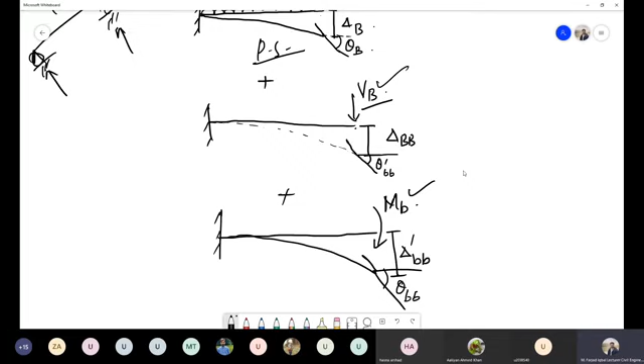Yes, sir. So now start writing the compatibility equation for this structure, for these four beams.

So what will be equation one? Anyone?

Delta B plus delta BB plus delta dash BB. Yes, it's that simple. So it will be delta B plus, because in the initial one we have this deflection, in the second one we have this deflection due to this vertical load, and in the third one we have delta dash BB.

So can I replace delta BB with F BB into VB, plus this delta dash BB is due to this particular moment, so I will replace this with F dash BB into moment, right?

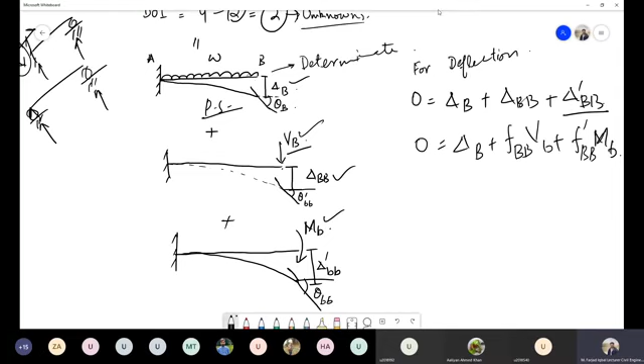In fact, with moment we usually apply the rotational flexibility. And for rotation, we have in the initial structure, the rotation was 0, which was our actual structure. And in the primary structure, we have this theta B. In this structure, we have this theta dash BB. And in this third structure, we have again theta BB.

On the same grounds, I can replace it with: 0 is equal to theta B plus theta dash BB. I can again replace it with alpha dash BB due to this force... actually I wrote it wrong, it should be F dash, because deflection is always due to the flexible rotation, or due to linear flexibility, and the rotation is due to angular flexibility. And this one is alpha BB into M.

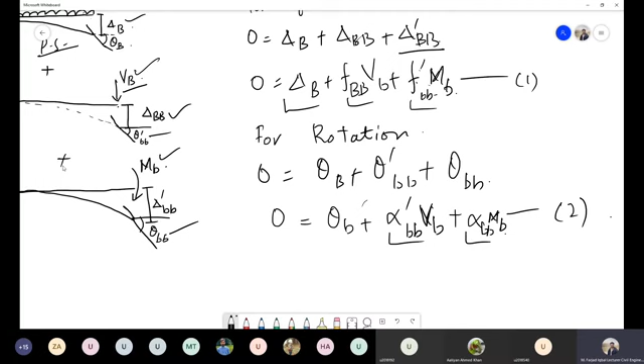Now I need to figure out these deflections, these flexibilities, and once I have these values, I can simply substitute into these two equations and I will get directly these unknown reactions and these moments. So again, in the book, the direct formulations are given for the calculation of these factors.

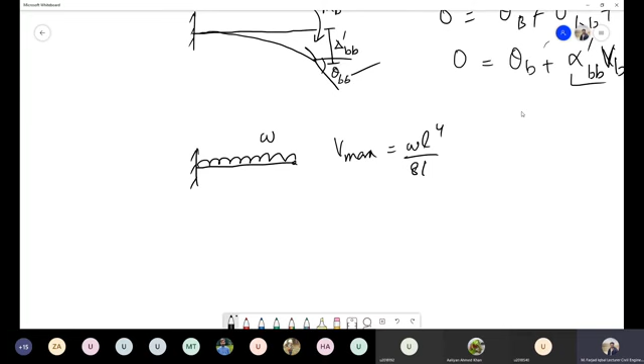For example, I will just write it over here. If we have a fixed beam on which this load of W kilonewton is acting, the deflection at the extreme end, or the maximum deflection, would be WL4 over 8 EI, and rotation at free end would be WL cube over 6 EI, right?

So from our case, we need the load W is acting over here, and it is producing the deflection delta B and the rotation as theta B. So for our case, this maximum deflection would be equal to delta B, and this maximum rotation would be equal to theta B. So now we have these two unknowns, that is delta B and theta B, and we need these flexibilities and rotation.

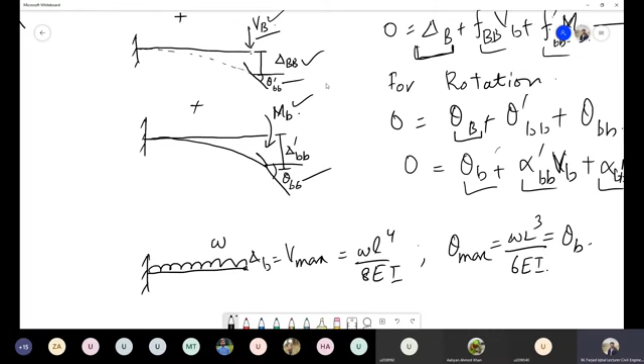And from the same concept, if you see the book, there will be this formulation that when a load of P is acting, it will produce some kind of rotation and some kind of deflection in this particular beam. So the rotation, this deflection would be delta is equal to PL cube over 3 EI.

Class, just give me a moment.

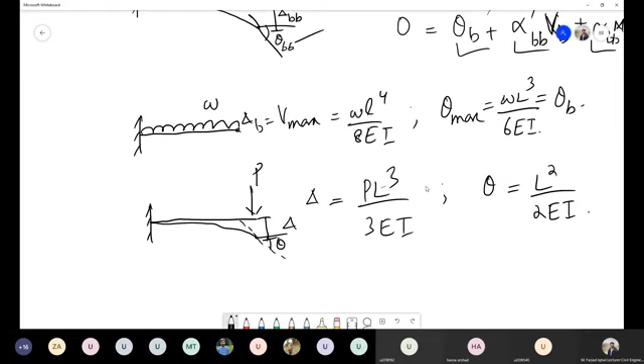Which flexibility will be this one? From this, we have 4 flexibilities: this FBB, this F dash BB, this alpha dash, and alpha BB. So which one will be this deflection? This one. Anyone? Or how can we correlate this with this FBB?

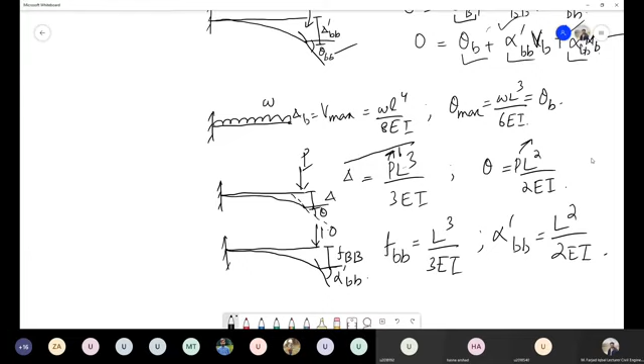So now we have, there is a lot of lag, okay. So basically what is flexibility? Flexibility is equal to deflection when the unit load is acting on the beam.

From the direct formulation, we have the formulation when a unit load of P is acting on the free end of a fixed ended beam, and it will produce some kind of deflection and rotation. So we have direct formulation. The formula for the deflection is PL cube over 3 EI, and for the rotation, the formula is PL square over 2 EI. But we need flexibility, not the rotations or deflection. So what will we do?

We will apply a unit load at this free end. One way is that you solve it by any method of calculation of deflection, like conjugate beam or moment area method or virtual work, or you can use these formulas directly.

If you have to use it directly, you will simply apply the unit load at this point, and due to this unit load, the deflection that will be produced will be equal to linear flexibility, that is FBB, just like this beam. For example, in this beam we have two deflections, linear and angular, two displacements.

The linear deflection that will be produced will be equal to FBB, and the rotational deflection or rotation that will be produced would be equal to rotational flexibility, that is alpha dash BB. In the same formula, we will replace this P with 1 and this P with 1, and that will be directly equal to our flexibility factor.

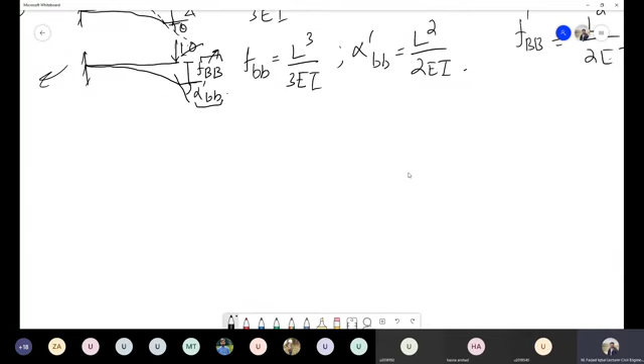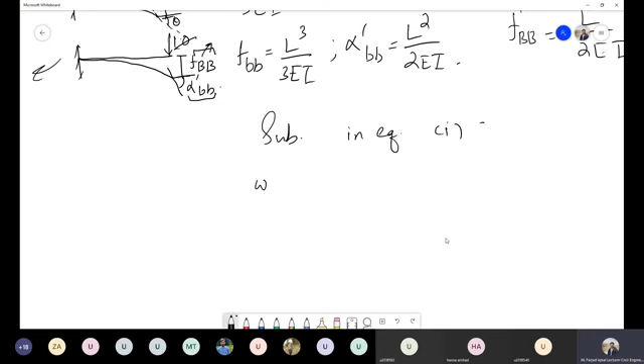So let's name this. When I substitute the values in equation 1, I have deflection that is equal to WL4 over 8EI, that is this one, that is this one.

And next thing is in equation 1 I have to substitute FBB, and this FBB will be equal to L cube over 3EI, and this F dash BB would be equal to L square over 2EI, which is written over here.

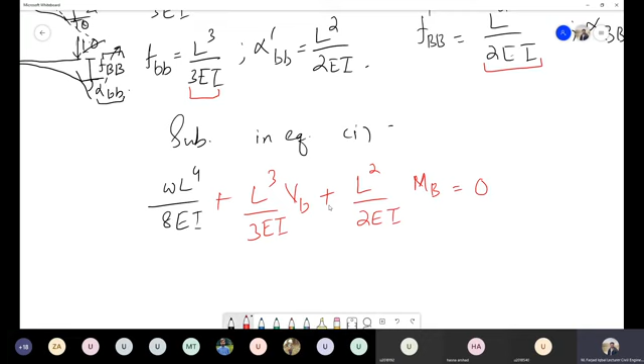So, actually it is with a positive sign. L cube over 3EI into VB plus this third one, L square over 2EI into MB equals to 0. Let's call this our equation 3.

So if I simplify this one, this EI will cancel out because they will go to this side and multiply with 0. And if I multiply this one by 24, I will get 3WL4 plus 8L cube into VB plus 12L square into MB is equal to 0. Let's call this equation 4.

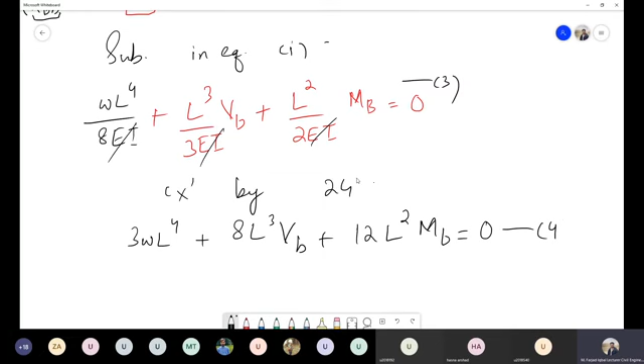In the same way, let's substitute the values in.

I'm suggesting you make your own notes because this solution is not available in any book, and you may get confused later on.

If I substitute the values back in equation 2, theta B is WL cube over 6EI, plus alpha dash BB which is L square over 2EI into VB, and alpha BB will be L over EI into MB, equals to 0.

I will multiply this by 6. The EI will cancel out because it goes to that side, and we will have WL cube plus 3L square into VB plus 6L into MB, equal to 0. Let's call this equation 5.

Now we have these two equations, equation 4 and equation 5, with two unknowns, VB and MB. So there are two unknowns and two equations, and we can solve it. Let's try.

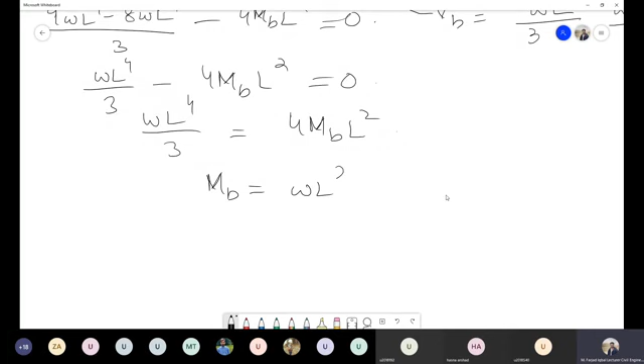This whole term will be WL4 over 3 minus 4MB — this is just simplification so you can understand it. So WL4 over 3 equals 4MB L square, and the final answer for MB will be WL square over 12. This is the moment, or the unknown moment, at the fixed end.

Now if I substitute this moment back into this equation, I will get the value for the shear force. I leave it up to you to calculate this shear force, and the final answer will be minus WL by 2.

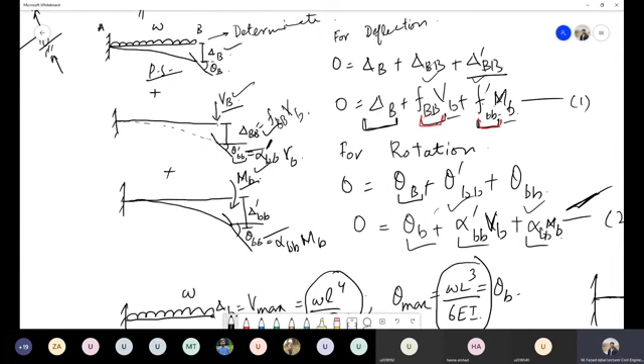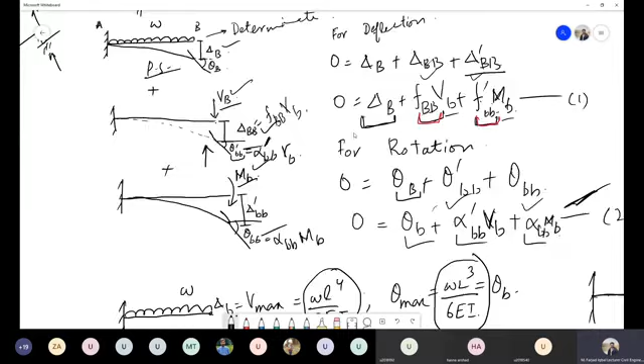The minus sign means that the direction we initially assumed was not correct, and we have to change it. For example, in this beam we assumed the vertical direction as downward, so that direction is not correct, and the actual direction is upward for this VB force. That's what I told you in the last lecture — just continue with the calculation, and if you get a negative sign at the end, you'll know the final direction.

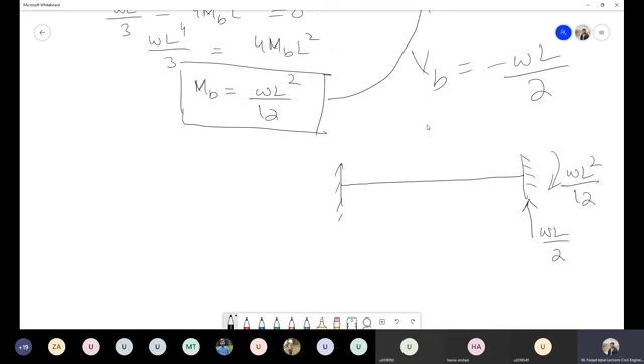So if I again draw this beam, now I have this reaction as WL by 2, this moment as WL square by 12, and there is a load of W acting on this beam. Can you give me these two reactions now? Can you calculate these two reactions?

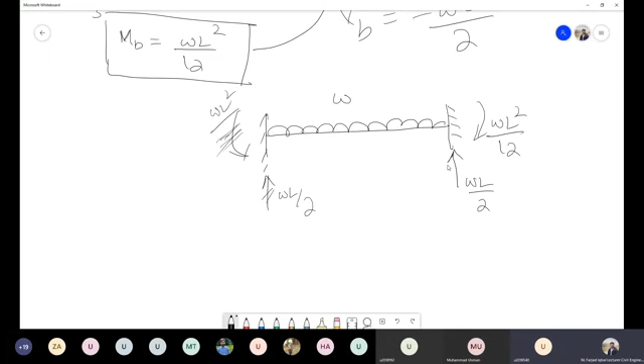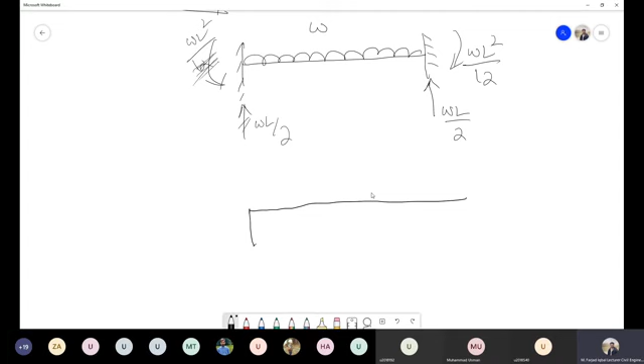So this is also WL square over 12. We were also supposed to plot the bending moment diagram. For this beam, if I plot this diagram, it would be something like this — it is negative, then it will continue to increase. What will be this component at the center? This will be WL square by 12. This will be WL square by 12. What will be this component?

Anyone? Is it that difficult? So without simplifying it, it's minus WL squared by 12 plus WL squared by 8. So the final answer will be WL square by 24. Yes, so this is how you now have solved an indeterminate beam with degree of indeterminacy equal to 2 using this method.

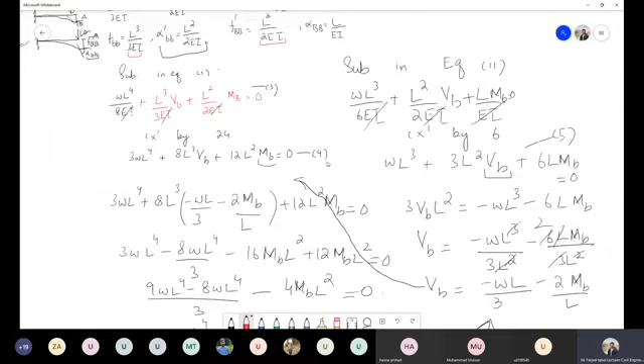So is there any question or confusion about this one? A student asks, can you show the original structure? The instructor points to it, saying, this one.

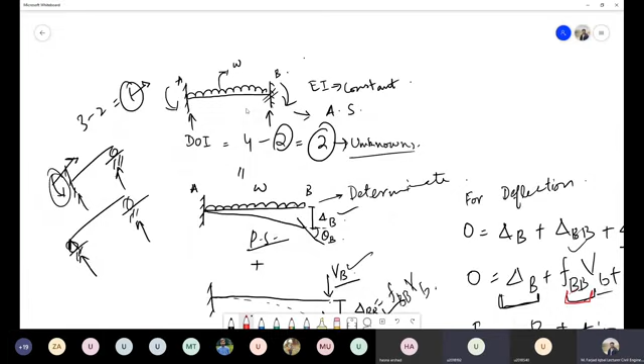सर अगर यहाँ पे बी पॉइंट पे फिक्स सपोर्ट की जगह अगर होती रोलर सपोर्ट तो हम उसका रिडंडेंट फोर्स कंसीडर करते वर्टिकल फोर्स और वो सिर्फ एक ही प्राइमरी स्ट्रक्चर होता, और रिडंडेंट मोमेंट हम सिर्फ तभी लेते हैं जब साथ यहाँ पे फिक्स्ड एंड हो। हम इसमें भी रिडंडेंट मूवमेंट ले सकते थे ना, अगर यहाँ रोलर सपोर्ट होता तो फिर हमें रिडंडेंट मोमेंट की जरूरत नहीं थी। राइट हैंड पे अगर आपने लेना था तो फिर ये वर्टिकल को रिमूव कर देते तो ये डिटर्मिनेट बन जाती, दैट विल बी दिस प्राइमरी स्ट्रक्चर, एंड देन आपके पास सिर्फ दो स्ट्रक्चर्स होने थे, तीन नहीं होने थे।

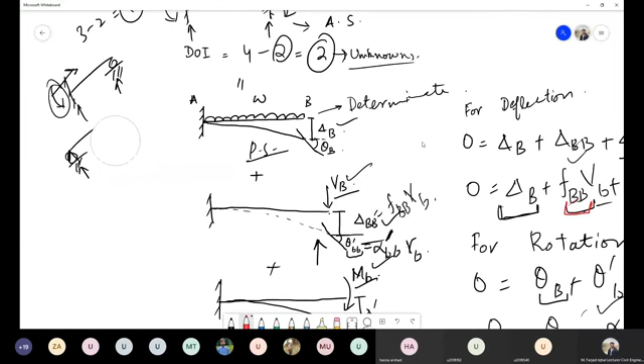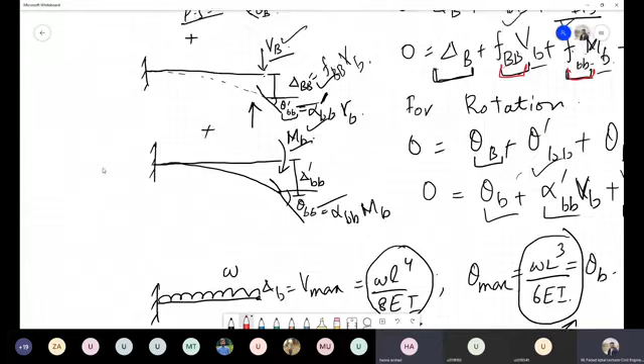सर ये जो प्राइमरी स्ट्रक्चर है, उसके बाद जो दूसरा है उसमें हमने थीटा डैश बी भी लिया ना? नोटेशन मैटर नहीं करते, अगर हम इसको थीटा बी भी ले लें और नेक्स्ट वाले को थीटा बी प्राइम ले लें, इट इज अप टू यू टू सेलेक्ट दिस नोटेशन। बस आपने ये देखनी है कि जब आप कैलकुलेशन कर रहे हो या इक्वेशंस लिख रहे हो इसकी रोटेशंस की, तब ये ख्याल रखना है कि जो थीटा डैश बी है वो वर्टिकल लोड जब लग रहा था तो उसकी वजह से जो रोटेशन थी।

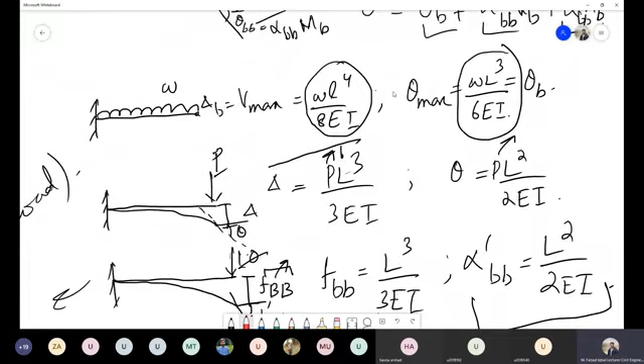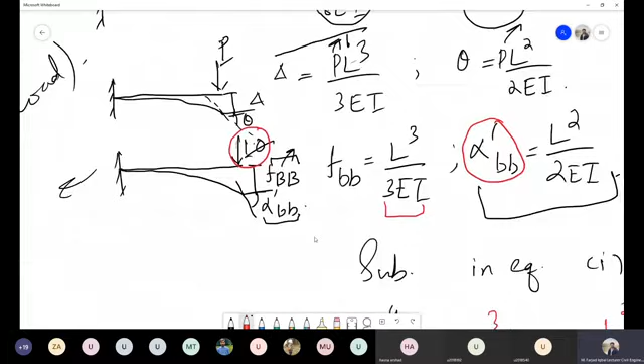तो यहाँ पे अब हमने जब ये फ्लेक्सिबिलिटी कैलकुलेट की थी, मतलब थीटा डैश बी बी की वजह से हमने इसको अल्फा डैश बी बी बनाया था, दिस वन। और जब हमने ये फ्लेक्सिबिलिटी कैलकुलेट की थी तो यहाँ पे यूनिट लोड वाला केस था, उसके अंदर जो रोटेशन थी दैट वाज इक्वल टू अल्फा डैश बी बी। ठीक है, तो इसमें कंफ्यूजन नहीं करनी, नोटेशन इट डजंट मैटर, आप कोई भी ले सकते हैं। इसी तरह जब मोमेंट था हमारे पास तब हमने इसको अल्फा बी बी कहा था जब मोमेंट लग रहा है। तो जब हमने कैलकुलेशन की थी दिस वन, तो जब मोमेंट लगाया था हमने यूनिट, तो उस वजह से जो डिफ्लेक्शन रोटेशन थी उसको हमने अल्फा बी बी कहा था।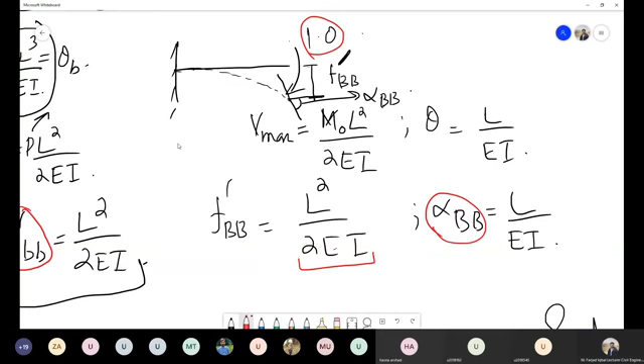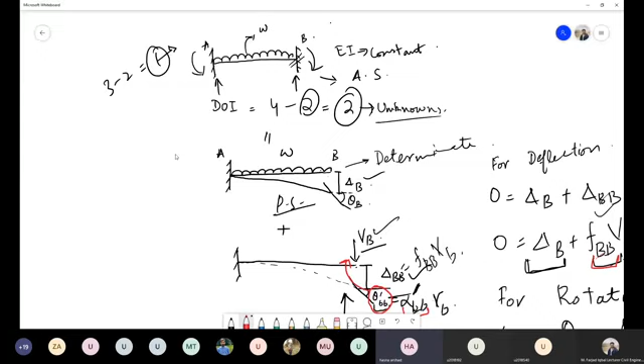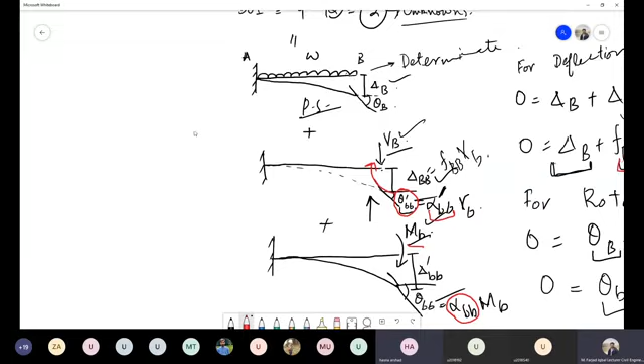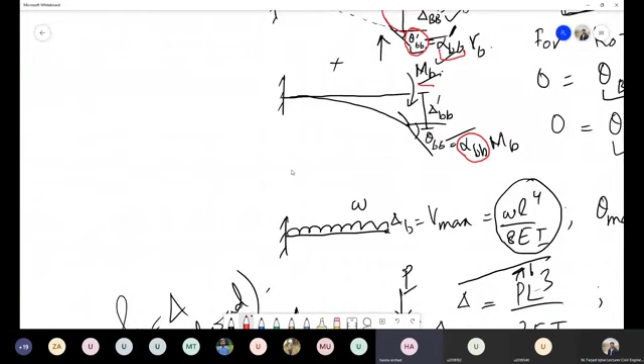ठीक है सर, और अगर हम लोग ए पॉइंट पे फॉर एग्जांपल रिडंडेंट लोड और रिडंडेंट मोमेंट लेते हैं, तो तब भी हम वहाँ पे यूनिट लोड लगाएंगे ना, और तब भी मतलब ये इक्वल होंगे, मतलब जो फ्लेक्सिबिलिटी और एंगुलर फ्लेक्सिबिलिटी होगी वो भी, जो हमारे पास इक्वेशंस थी WL4/8EI और जो V मैक्स और थीटा मैक्स की इक्वेशंस थी, फिर भी वो बराबर होती। लेकिन न्यूमेरिकली तो फिर L 0 होता ना जब हम इसको सब्स्टिट्यूट करते। आपकी सेम ही कंडीशन है ना, मतलब फॉर एग्जांपल अगर ये हो एक रोलर बीम और एक बीम ये हो, इन दोनों में कोई डिफरेंस है?

उसकी जो लेंथ थी वो आप इस एंड से लेनी पड़नी थी, क्योंकि आपकी लेंथ फिक्स एंड के रेफरेंस से आ रही है। नहीं तो इसमें सेम ही होगा लेंथ, फिर हम दूसरी साइड से कंसिडर करेंगे, मतलब राइट साइड से। आप ये बताएं, इन दोनों को फिजिकली देखें ना, अभी लेंथ को छोड़ दें, इन दोनों बीम्स में कोई डिफरेंस है?

नहीं है ना? तो इसीलिए जब ये जो हमारे फाइनल आंसर्स आए हैं, दोनों एंड से सेम ही आए हैं। अगर आप उधर से भी चलते तब भी आपके पास यही आंसर आने थे। बस एक डिफरेंस यही है, मैथमेटिकली देखें तो अगर पहले हमने इस तरह लिया है तो वो रेफरेंस पॉइंट आपका ये फिक्स्ड एंड था। अगर आप उधर से देते तो फिर आपका रेफरेंस पॉइंट ये हो जाता। ठीक है, और बुक में भी इसी रेफरेंस से दी होगी। अगर इस तरह का कोई केस होगा तो वो आपकी जजमेंट पे है कि आपने कहाँ से लेंथ लेनी है, तो ऑब्वियसली आप बुक में देखेंगे कि आपका रेफरेंस क्या है। रेफरेंस आपका फिक्स सपोर्ट है तो आप इस केस में भी रेफरेंस फिक्स सपोर्ट ही रखेंगे, राइट?

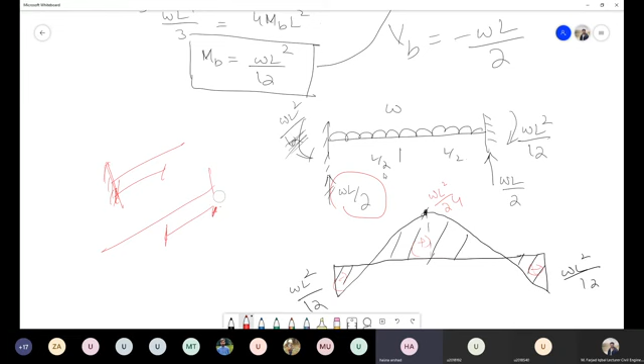आप पहले उस केस में ये देखते हैं आप किस तरह उसको कैलकुलेट कर रहे थे, कोई आपने बीम लिया था या आपने मोमेंट एरिया मेथड से किया था, कैसे किया था? सर मैंने मोमेंट एरिया से करने की कोशिश की थी पर हुआ नहीं। लेकिन मतलब मुझे ये था कि रेफरेंस कौन सा लेना है, मैं इसी में कंफ्यूज हो रही थी कि वो रेफरेंस डिपेंड करता है उस पर कि आपके पास, मतलब फॉर एग्जांपल आप वो क्वेश्चन... ये क्वेश्चन था समथिंग लाइक दिस, राइट?

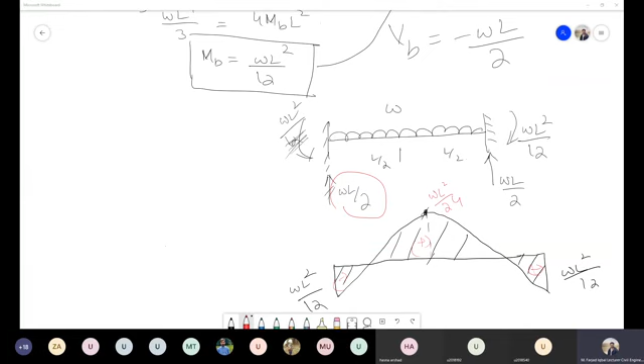So there is an assignment problem. Can you see the slides? In this one, you have a fixed end at point A, a hinge support at B, and again a hinge support at point C. There are two extra unknown reactions, so the degree of indeterminacy for this beam is 2, and you have to analyze it and find the reactions. It will be quite simple because there are actual mathematical values, not variables, so it would be quite easy to solve this question.

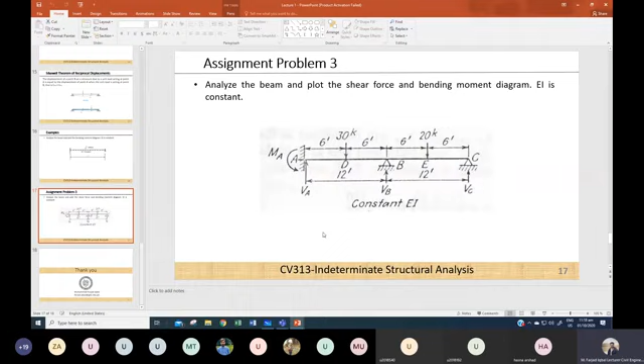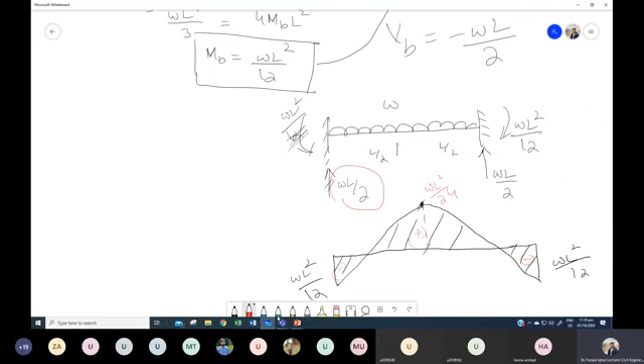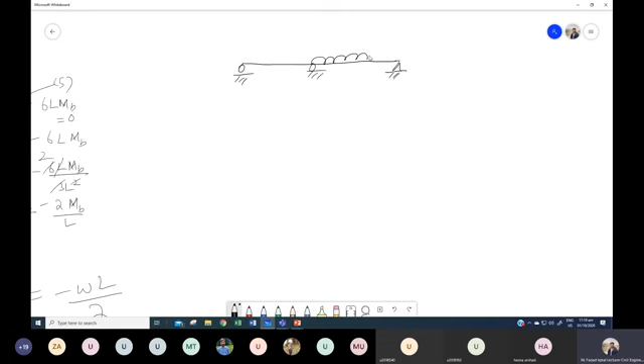So we have this beam on which a UDL of 3 kip per foot is acting, and there is a point load of 12 kips. This is 6 feet, 6 feet, and 12 feet, at points A, B, and C, and we are supposed to analyze it and figure out the reactions. So can anyone tell me what will be the compatibility equation?

Let's just plot the structure. This is our actual structure. In the primary structure, let's consider this central support as redundant, and we would remove this one and plot our primary structure. So this primary structure is now determinate, and there is a UDL of 3 kip per foot and a point load of 12 kips acting on it.

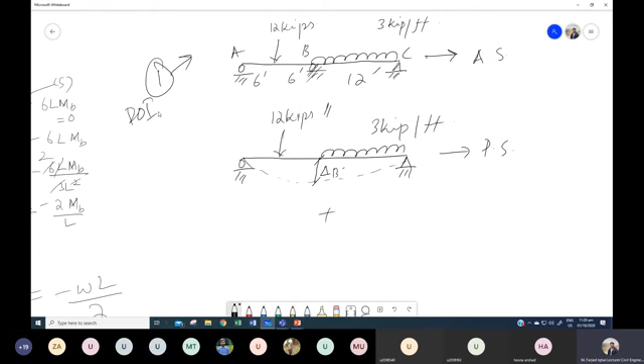This deflection at the center, let's call this delta B. So this is our primary structure, and in this one we just have to remove one support because there is one extra unknown reaction, or the degree of indeterminacy is 1, so we have to remove only one particular support and we can get to the result. So this is our primary structure, and in the structure on which we would apply the redundant reaction or redundant moment would be this one.

Let's apply the moment redundant reaction in this upward direction. Due to this, it will also deflect, and there will be some deflection, let's call this delta dash BB. Actually, BB means that it is the deflection at point B due to the load acting at point B. So if I write the compatibility equation, that would be...

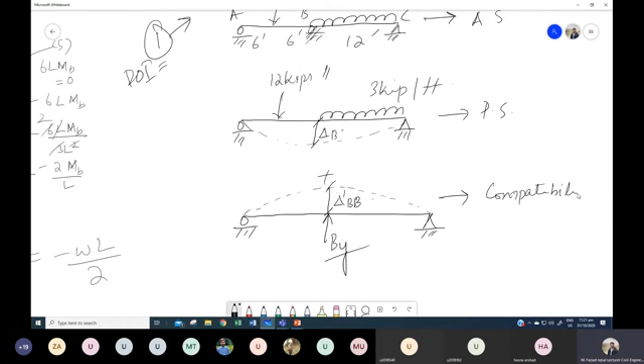zero. There is no deflection in the actual structure, and in the primary structure we have delta B, and in this third structure we have, in the opposite direction, minus delta dash BB. So 0 is equal to delta B minus, if I replace this delta dash BB by the flexibility term, it would be FBB into BY. So this is our equation. Is there any confusion about this?

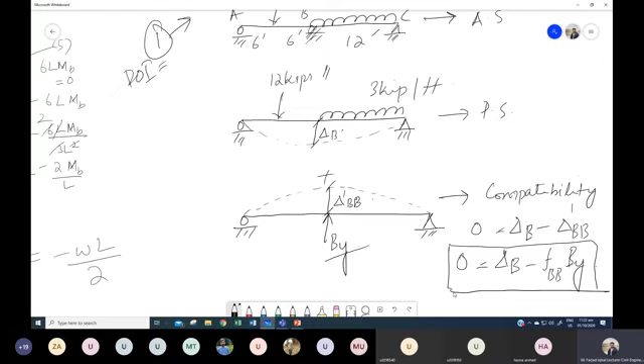So I hope that everyone got this, but there is a problem. Let me show you the book.

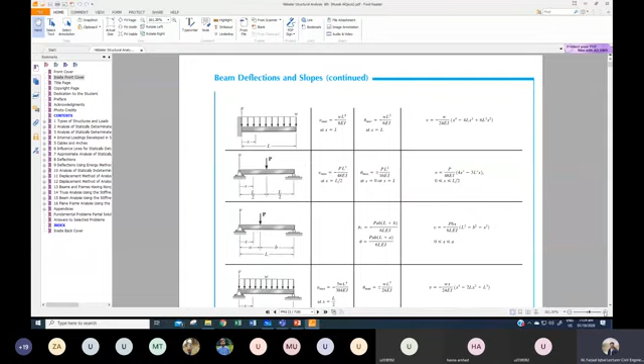these are the equations or the direct formulations that are given, but in this one they have given us the formulation only for a single load. For example, in this beam only a point load is acting, and in this fourth beam, there is only a UDL acting, which is similar to our case.

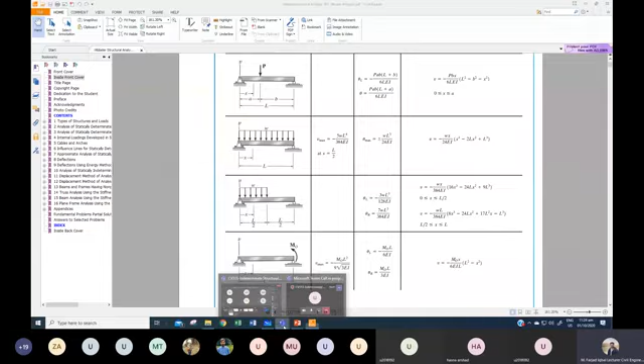But there is no case in which the combination of these two loads, for example, in our case, there is a combination of loads, this 12 kip and 3 kip per foot. So there are two ways, it's up to you.

One, you can use any method of calculation of deflection and figure out the deflection. But if you want to use the direct formulation, you don't have any formula for this kind of combination of load, so you will further divide to make things easier.

You can further divide this one into two beams, for example, let's just erase it.

Now, since I don't have a direct formula, I would say that in my first beam, there is a load of 3 kip per foot acting on this beam, and it will produce a deflection delta dash B. You can do it by the previous method I told you, but for that you have to apply some method to calculate the deflection.

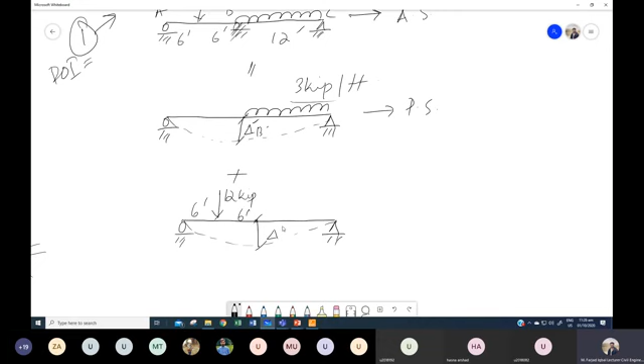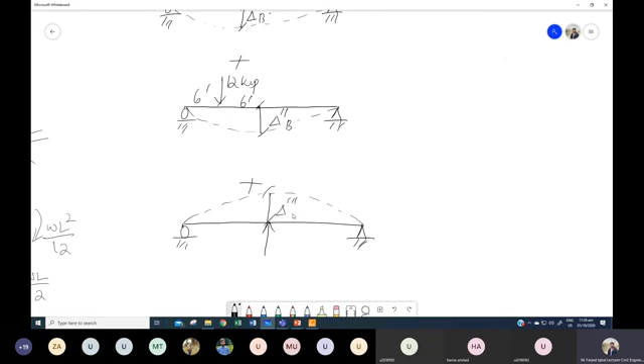Or you can do this: in the first case, only the UDL is acting, which will produce deflection delta dash B. In the second case, only the point load of 12 kip is acting, producing a deflection we'll call delta double dash B. And in the third case, the redundant reaction is acting, producing a deflection we'll call delta triple dash B.

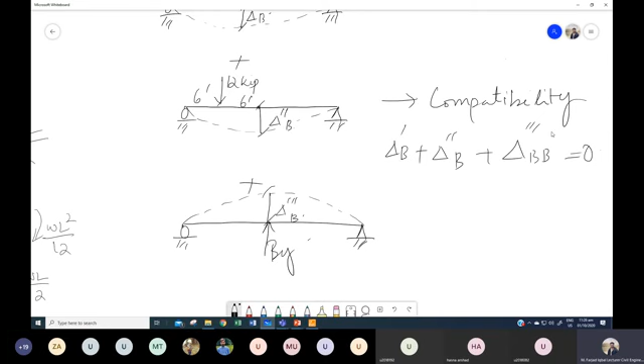So now I have delta dash B, the deflection due to this UDL, delta double dash B, the deflection due to this point load of 12 kip, and the third deflection due to this reaction. This one I can replace with flexibility, and there should be a negative sign, so that will be delta dash B plus delta double dash B minus FBB into BY.

So this can also be a compatibility equation, and now we can use the direct formulation to figure out this deflection. For the first case, in which the UDL is acting, the formula for deflection at center is: delta equals minus, ignoring the sign, Wx over 384EI into 16x cube minus 24Lx square plus 9L cube. Here this is 24 feet and this is 24 feet.

So if I substitute the values, x is the distance or point at which you want to find the deflection. For example, in this case we need the deflection at this point, sorry this is 12 feet actually, this is also 12 feet. We would like to find the deflection at the center, that is at 12 feet, so x in our case will be 12.

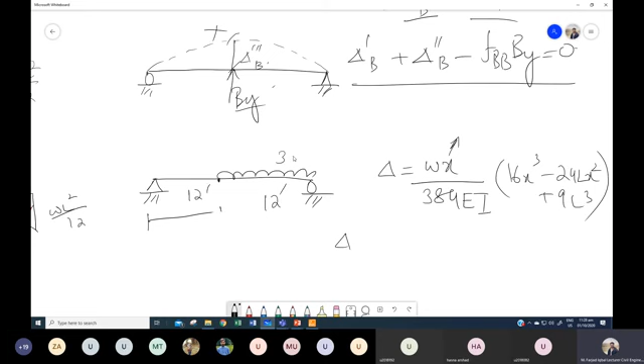So if I substitute the values in this one, this load is 3 kip, so this would be 3. This x is 12, this will be same: 16 into 12 cube minus 24, length is 24, x is again 12 square plus 9 into 24 cube. So what will be the value of deflection due to this UDL?

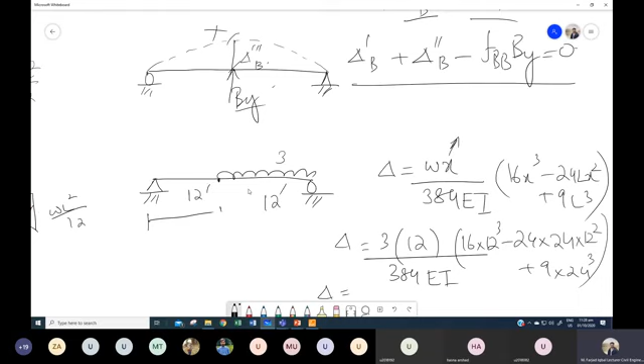Can anyone give me this answer? Class, what will be this deflection?

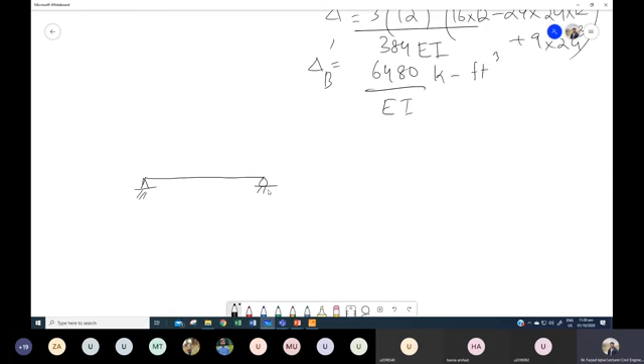So this deflection, delta B dash, is equal to 6480 over EI, and the units are kip feet cube. And for the case when a point load is acting, this formulation is not given in the book, so just note it down: when a point load of P is acting, and this distance is A, this distance is B, and there is an X distance, so the deflection would be...

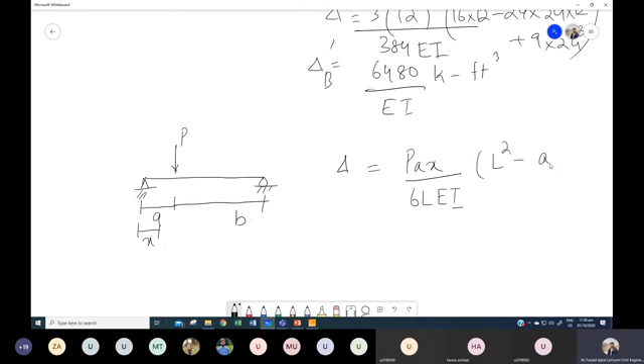PAX over 6LEI into L square minus A square minus X square. So A is the distance of this point load from the left support, X is the distance to the point at which we would like to calculate the deflection, and L is the total length. So for our case, we have this beam...

on which this 12 kip is acting at 6 feet. This is 6 feet, and again this is 12 feet, and we would like to calculate the deflection at 12 feet. So X is equal to 12, A is equal to 6 feet.

So if I substitute the values: P is equal to 12, A is equal to 6, X is equal to 12, total length is 24. This EI will remain as it is. Length again is 24 square, A is again 6 square, X is 12 square. So what is the deflection? Or this one is delta B double dash.

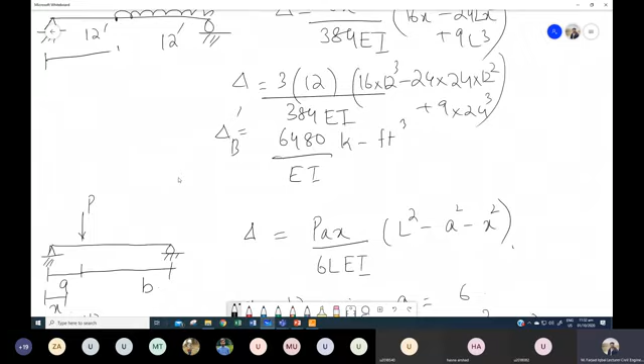So for FBB, we know that if there is a beam on which a load is acting at the center, the deflection is PL cube over 48EI. So we want to find the flexibility. Flexibility would be, again, we replace this by 1 and the deflection would be PL cube. So this will be 1. So flexibility will be L cube, that is 24 for our case, over 48 into EI. So what will be flexibility?

This P is 1. Set 288 over E. So this will be 288 over EI feet cube.

So now we have all three knowns and we just need to substitute into this equation. And when we do it, we will get 6480 over EI plus 2376 over EI minus 288 over EI BY, that is equal to 0.

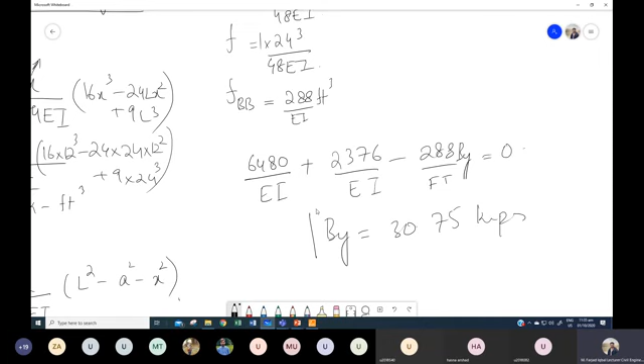So we have one unknown reaction in this beam, and now we can apply the equation of equilibrium to find out the other reactions. In this beam, this reaction is 30.75. This is a hinge support. We have the rollers and the UDL. This is 12 kips, 6 feet, 6 feet, 12 feet. So what will be this reaction RA? And what is RC?

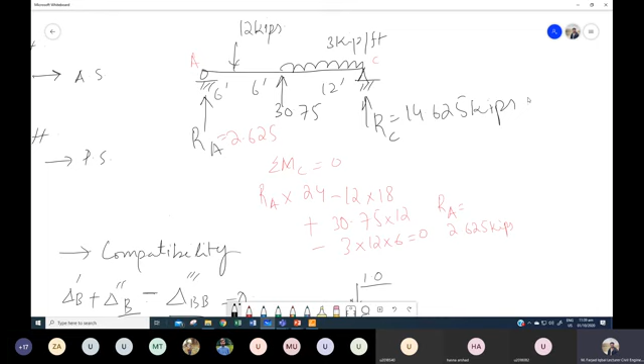So is there any confusion about this one? And what is RC now? 14.625. How much? 14.625, so this is 14.625 kips. So now we have all the reactions and we can plot the shear force diagram and bending moment diagram.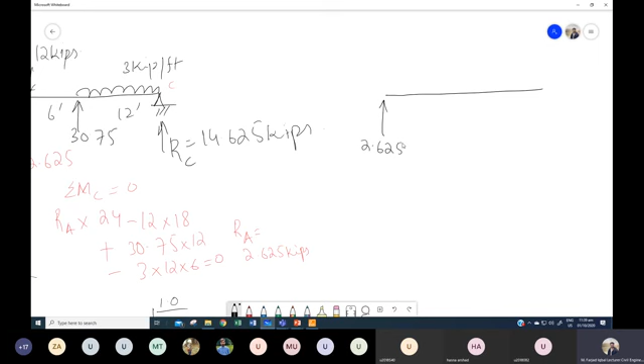This is 2.625, this is 30.75, this is 14.625, and over here we have 12, this one is 3. So if I plot the shear force diagram, it would be 2.625, then it will go there, come down. What will be this component? And this component? So this is 2.625. What will be this component, anyone?

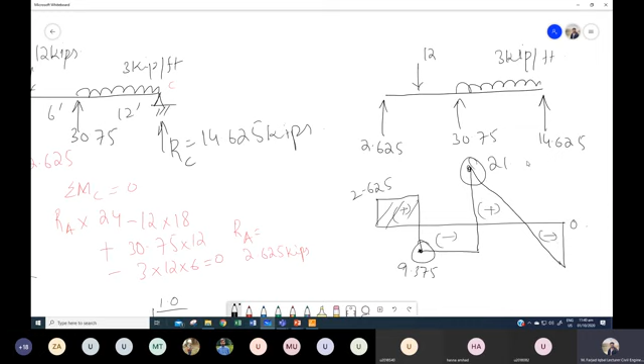9.375. And this one is 21.4 something. So this is the shear force diagram, and again this will be the bending moment diagram, and I expect you to plot this quickly. And from this diagram, if these diagrams are closing at the end point, this means your calculations are correct. So this is the bending moment diagram.

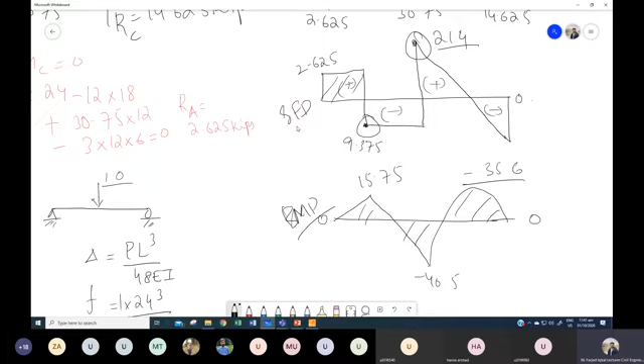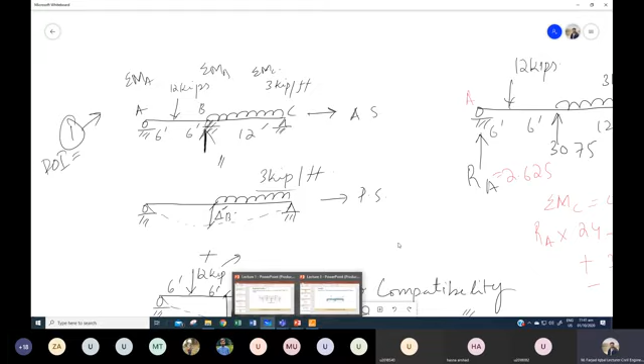So this is how you have to solve. This is it from the application of force method to the beams. In the next lecture, we will be starting this force method for the frames and then trusses. So is there any question about this particular question?

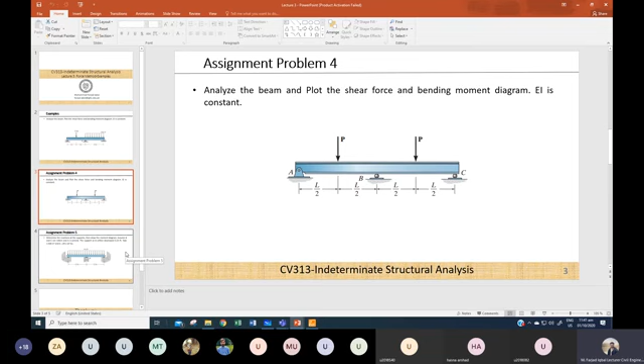So if there is no question, then there are two more assignment problems in these slides. One is this one, quite similar to what we have already done. There are 2 point loads and the distances are given. You are supposed to analyze and plot the diagrams. And there is another question, that is this one. There is a small difference in this problem.

Again, you are supposed to analyze this one, but there is a condition that the support at point B settles downward by 0.25 feet. And then they have also provided us with the values of I and E. So you have to consider this condition. So can anyone tell me how this small condition can affect our compatibility equation?

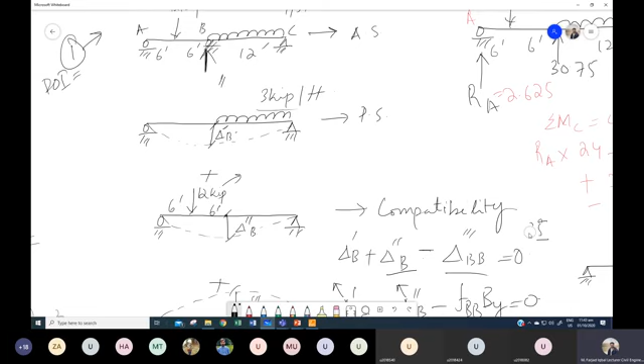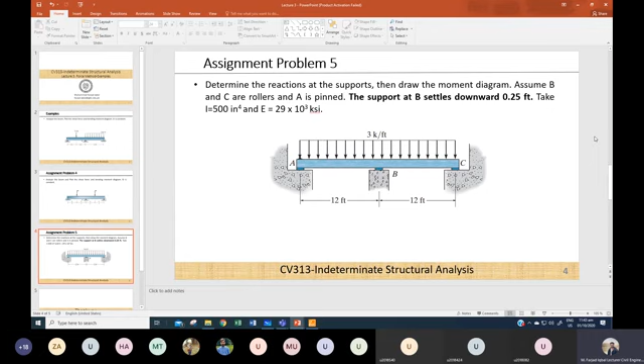So if there is any question, you can ask me. Otherwise, this is it from today's lecture.